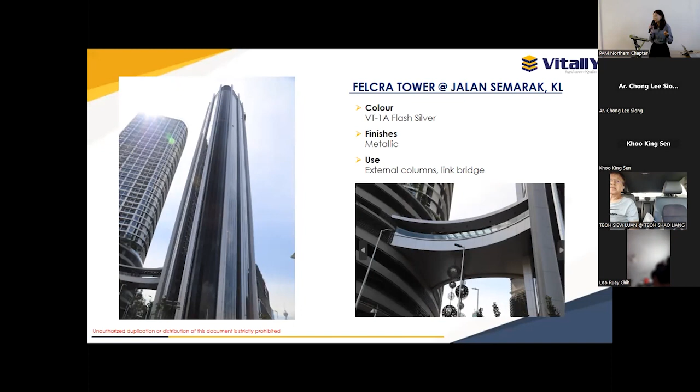Next, we have Felcra HQ at Jalan Semarak KL. For this project, they also applied external cladding, in silver color cladding.

The next one is the sales gallery project. For IJM sales gallery, you can see they applied ACP for 3 areas: the louvers, the ceiling, and also the wall hanging. For this project, we did a special color matching, since for us, we can always do color matching if the color you want is not in our standard range.

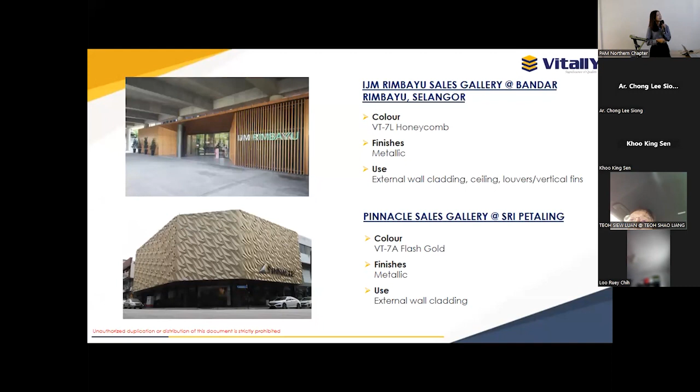So for us, we don't only supply standard solid and metallic colors, but we also supply wood look-alike or stone look-alike ACP, as well as hairline finish. One thing about hairline is it's easy to get corroded if you don't do maintenance, so regular maintenance is very important for this kind of finishing.

SUKE Toll Plaza - this one they are applying for decorative purpose also for the top panel here. They have the silver color panel and also they tag with their office.

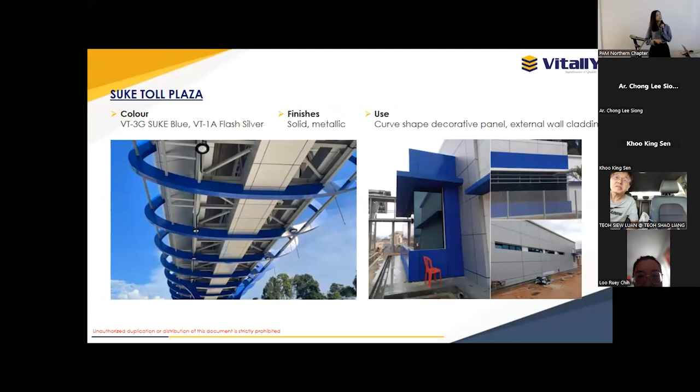Now I'll give you a brief on our company background and also our product.

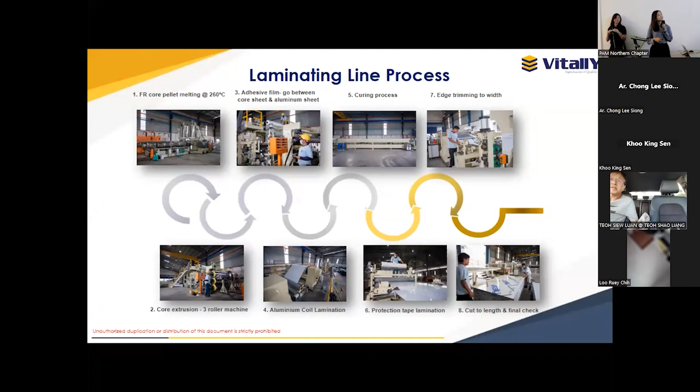And this is what we have and what we produce in our factory. Basically, all our ACP are 3 layer assembly, but come in different sets for different application. So we have ACP for external application, for interior use, awning and roofing, and also signboard. But today our focus will be the ACP for external application.

So for external application, ACP needs to meet the requirement of MS 257-2017. I believe you're familiar and you know about them, so I will just quickly go through about this.

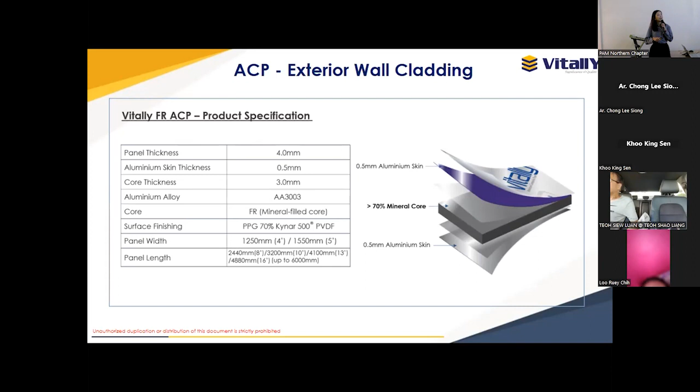So when we supply a panel to the contractor, the subcontractor, it's actually in a flat sheet. So the fabrication will be done by the fabricator, right? So the standard size that we have is 1250 mm for the width, and the length we can go up to 6 meters.

So in terms of ACP compliance, actually the usage of ACP material in design is actually very important. Following the London fire case in Grenfell Tower, actually now they are very strict on material used against cladding, especially on high-rise buildings. I believe you all know about this fire case.

So this case actually cost 72 lives because of the use of highly combustible cladding material. So our FR ACP, particularly FR ACP, is actually designed to limit the spread of flame and slow down the fire growth.

So the core material that we have in our FR panel ACP is actually containing 70% of non-halogen magnesium hydroxide. For this magnesium hydroxide itself, it plays a very important role where it will actually help to absorb heat from the material surface when there's a fire, and eventually it will help to cool down the building and also give a smoke suppression effect. So this can actually give more time in order to evacuate the building in case of fire.

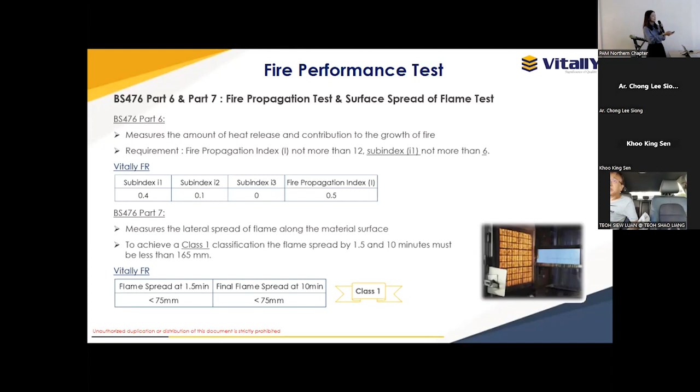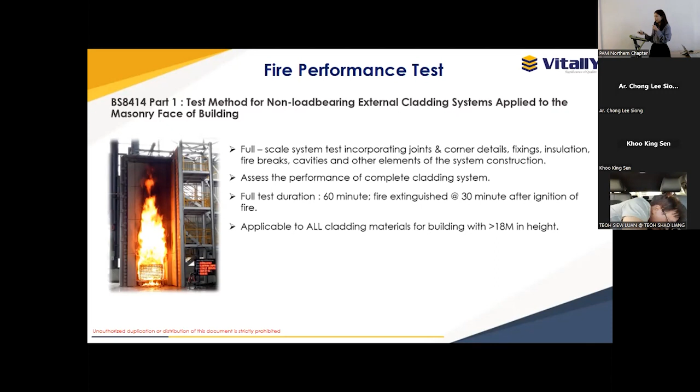For 8414, I believe you're aware, this requirement is for buildings 18 meters in height and above. In terms of coating, our ACP coating meets the standard of AAMA 2605, which is the highest standard for coating performance.

A coating meeting the AAMA 2605 standard is usually a 70% fluorocarbon-based or 70% PVDF-based coating. This coating lasts a minimum of 10 years, and is highly resistant to chalking, chipping, gloss loss, and chemicals.

For your information, our coil coater is PPG certified. We use PPG coating for certain finishes, and our coil coater is certified. It's very important to make sure your panel's coil coater is a certified applicator, because only a certified applicator will be able to give you the warranty letter.

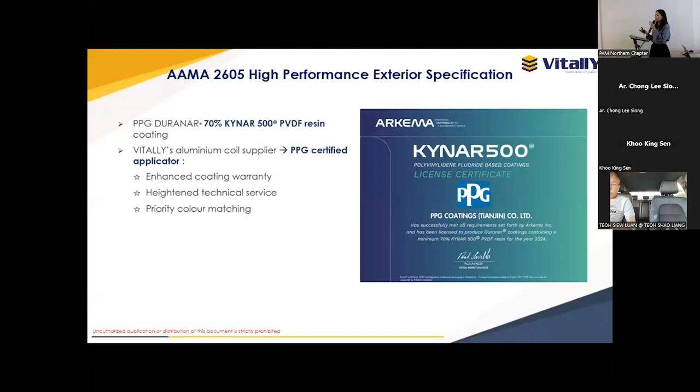In our case, we use PPG coating, and our coater is a PPG certified applicator. They are well trained in PPG application and can provide us with a PPG warranty letter. So as a manufacturer, we give you our manufacturing product warranty, and on top of that, we can give you the warranty letter for application as well.

This is the standard colors in our color chart. Currently, we have 37 colors, including solid and metallic series. Apart from the standard colors I showed you earlier, we can also supply special series like wood grain, stone grain, marble effect, as well as hairline or brushed finish.

For certain series, the price will be slightly higher, and we will require a minimum order quantity for those series. For standard colors, we don't have any MOQ.

And there are some common misconceptions on ACP quality issues that I would like to share with you here.

The first issue is color tonality or color variation issue. Color variation may occur due to several reasons. The first reason is using different batches of production for one project. It's very important to order all the panels you need in one single order from a single batch production. If you order from different batches, you will have slight color difference.

The second reason is improper orientation of the panel. During installation, you have to follow the assembly direction marked on the protective film, because if you install the panel in a different direction, it will reflect light differently, causing variation in the color perceived.

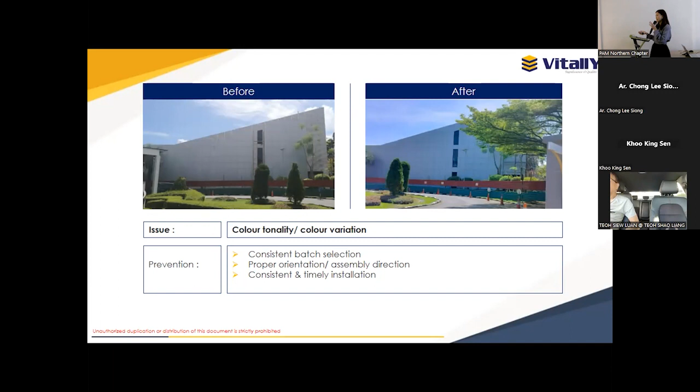The third reason is the installation timeline. A prolonged installation timeline may cause color variation due to exposure to the environment. Panels installed at an earlier stage will have a slightly different color tone compared to panels installed later, due to environmental exposure. That's why it's important to control the installation timeline between the first panel installed and the last panel installed, to avoid this coloration issue.

The third issue I'd like to share is staining and contamination. This is usually caused by improper use of the sealant or silicone used to seal the gap between panels. Selecting the right type of sealant is very important — we always encourage using a non-oil-based, non-staining, or non-leaching silicone. If you use an oil-based sealant, it may cause oily residue on the panel surface, leading to staining issues and causing the panels to look dull or lose their shine.

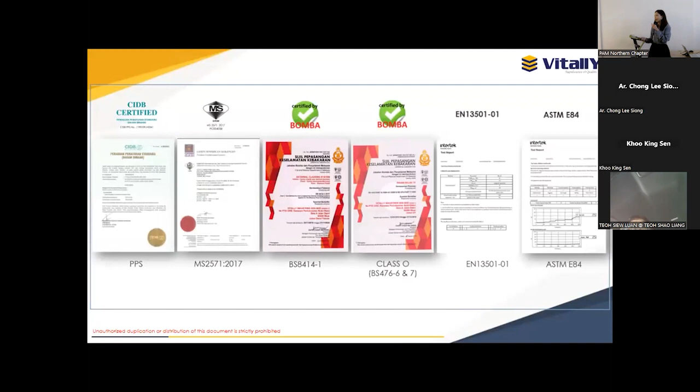I'll show you our product certificate and test report. This is what we have for our YCFR. You can find our product listed in Green Pages Malaysia, contributing to GBI points. EQ4 and EQ2 are mainly for indoor categories, and MR3 is for regional materials. Because we are a local manufacturer, we can help reduce the environmental impact resulting from pollution.

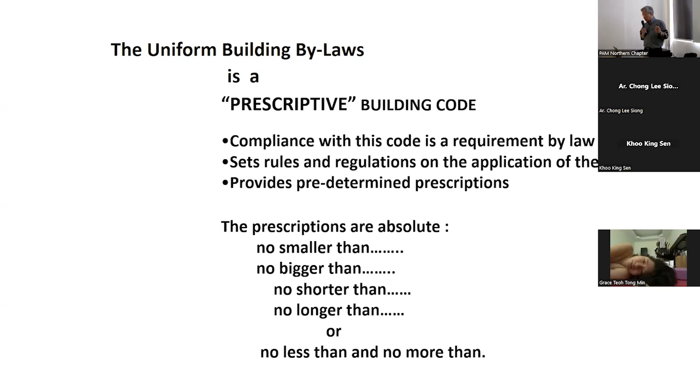Now, we also have this other document among the many standards available for all the different products, all the different applications and all that. We do have one overall Malaysian standard called MS 1183. And this... I think something's wrong again.

As standards go, standards are not a law, it is not a statutory law. Standards are a descriptive code of practice. This is where we get all our informative descriptions of what it means to have to do certain things. It establishes normative practices and it describes performance.

This is what we refer to when we come to our activity plan. The bylaw is just like a summary — at the end of everything, after you talk about what you need to do and all that, the law says you cannot be bigger than that, or cannot be this, that's all that it's important for. So you have to read all these documents together and implement them.

Alright, so I'll start with fire stop. What is your understanding of fire stop? Well, we are under the UBBL, right? So that will be UBBL first. What does the UBBL say about fire stop?

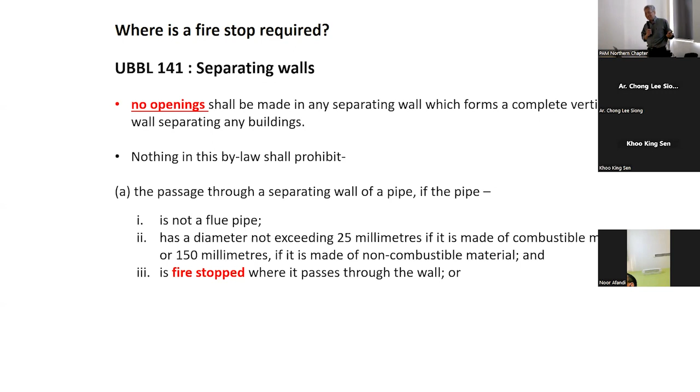Okay, opening and separating wall, which is necessary as a means of escape from fire. Actually what we mean is that if you have a separating wall, you need accommodation, access, not necessarily like that. You need an opening, you need to open the door and install things like that. Very obvious.

So it says that if an opening is in a separating wall, the FRP of an element shall not be less than that required. What this really says is, if we have a separating wall - and separating wall in this instance means fire wall, that's the interpretation - it means that whatever you do, whether you have an opening, a door, anything that features in that wall, it must be fire stopped to the same integrity as the wall as a component.

Okay, so now what do we mean by fire stop? It is actually to preserve the integrity of that component against fire.

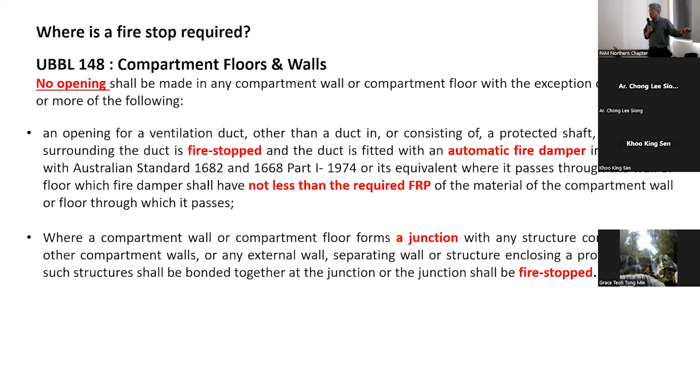And where a compartment wall forms a junction, all these junctions and others must be fire stopped. Yeah, very, very good. So where does that bring us? We're still asking what can be used as a fire stop, or what do you mean by fire stop? Now we know we have to protect all openings.

So if I continue going through, I need to ensure that opening has got the same fire integrity as the wall. But you keep mentioning fire stop - so what exactly can I use as a fire stop?

So it says: any fire stop - and here the word 'shall' appears - any fire stop, if provided around a pipe or duct in a cavity, is made of a non-combustible material. Great, so a fire stop is non-combustible. Thank you, and very important: if provided around a pipe or duct, it must be so constructed as not to restrict essential thermal movement.

So now we're getting somewhere. It says first the fire stop is non-combustible - yeah, of course, if something is supposed to stop fire, I suppose the first requirement is it's not burning itself in the first place. And then it also says the mechanical requirement is that fire stops are so constructed as not to restrict essential thermal movement. Any fire stop formed at the junction of two or more elements shall be made of non-combustible material, reiterating again the non-combustibility requirement.

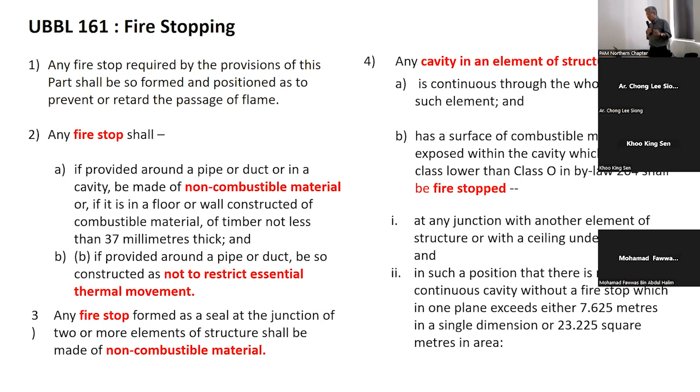You may go through a wall, you may allow it, but for a non-combustible pipe, say ductile iron, GI, or any metallic construction, maximum 150 millimeters diameter, and in any case, all of it must be fire stopped around it. What this allows, generally, if it's a non-combustible pipe, is that as part of our field interpretation, this non-combustible pipe will not burn greatly, so all you need to do is fire stop where it passes through the wall. If it's a combustible pipe, in the event that the pipe or conduit does burn away, the opening left through the wall should be no bigger than 25 millimeters diameter. That is really what this clause is trying to say.

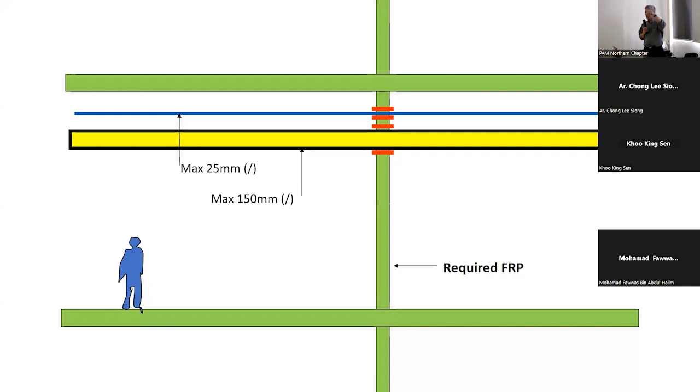In a worst case scenario, should the pipe burn away, the penetration left through the wall should not be more than that. If you have a big duct going through, like an air duct, the bylaw describes that the duct must have a fire damper that closes automatically. So this preserves the integrity of the wall element, and that fire damper must operate automatically.

Alternatively, and this is not exactly what the bylaw describes, but using the same notion, if you wrap this entire duct within a fire-rated horizontal shaft or fire-rated closure, in other words protecting the entire duct by wrapping it in a fire-rated non-combustible enclosure, then you do not need the dampers because you'll be relying on the fire rating of the duct itself, same principle as the non-combustible pipe - you don't need to wrap around it. This is the concept.

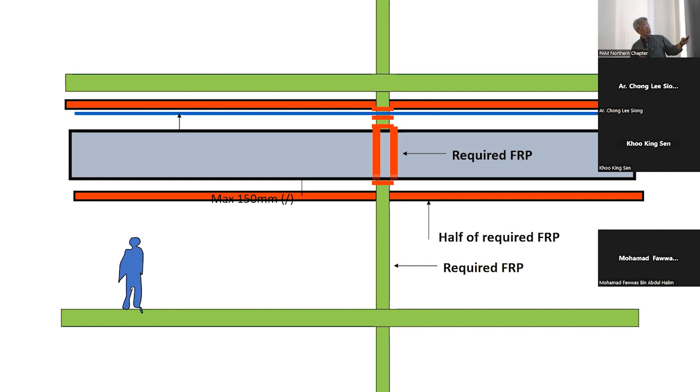Another example, if you have a vertical shaft going through a vertical penetration - same thing, floor to floor compartmentation, exactly the same thing - but if you're creating a vertical shaft like this, then that element is not an element of structure, it is purely an enclosure to form the shaft, so that is half the required FRP. If you have full FRP for structure, constructing everything as a structural element, all structural elements are to form the required FRP.

So if you have something connecting to all these elements, then those fire dampers may be half the required FRP, because it's going through a shaft. And if you are having doors, then the doors may be of the required FRP. So there's always a lot of confusion - they say, oh, fire doors are half the FRP of the building, so maybe the building is 2 hour FRP and fire doors are 1 hour FRP. No. Fire doors are supposed to be full FRP.

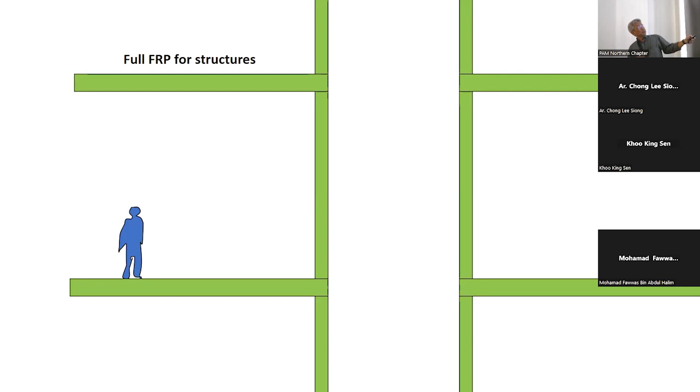But then I said, I'm sure somewhere there's a bylaw that says fire doors are supposed to be half FRP. Yeah, it's only half FRP if the door is leading into a protected shaft, or if the door is opening into a protected passageway. The concept is this: the structure requires, let's say, 2 hours FRP. So if a fire burns here, the structural integrity and stability must exist for a maximum of 2 hours - so all these elements will block it for 2 hours. If you have a protected shaft like this, between the compartments, now you've got another intermediate shaft. So if you have an element connecting this compartment to that compartment via this shaft element, it's safe to say that's why you are allowed to have half the FRP - because if a fire burns here, after 1 hour it may burn through here, but you've got another hour of resistance backup.

If you have to write new bylaws today, I wouldn't even personally bother with this description because it just creates so much confusion. In our current projects, I'm going to comment on this - please don't tell my client - I don't go to this extent of identifying which are the doors that we have on our page.

Because we've had problems before. There'll be so many layers of documentation that can get us into trouble. First, our own architect specifying the doors - you trust that he knows exactly what he's doing. Then there'll be our draftsman, or whoever it is, cleaning all these things into our documents. Do you trust that guy?

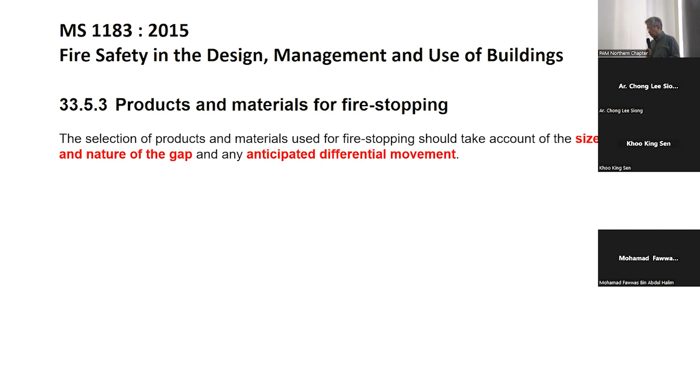In a case where minimum differential movement is anticipated and where the gap does not exceed 5mm, the following fire stopping materials will be used as evidence - this is in Malaysian Standard 1183: A, cement mortar; B, gypsum-based plaster; and C, cement or gypsum-based vermiculite or perlite mixes.

Now, why did Malaysian Standard 1183 come down to mention these three items? Because these three elements - cement mortar, gypsum-based plaster, and cement or gypsum-based vermiculite perlite mixes - are in our Schedule 7 of the UBBL, among the materials that are deemed to comply. So in the UBBL, where it says non-combustible materials for use for many other purposes, these three elements are in that schedule. So Malaysian Standard MS 1183 makes reference to that - whenever non-combustibility is mentioned, these three elements are deemed to comply.

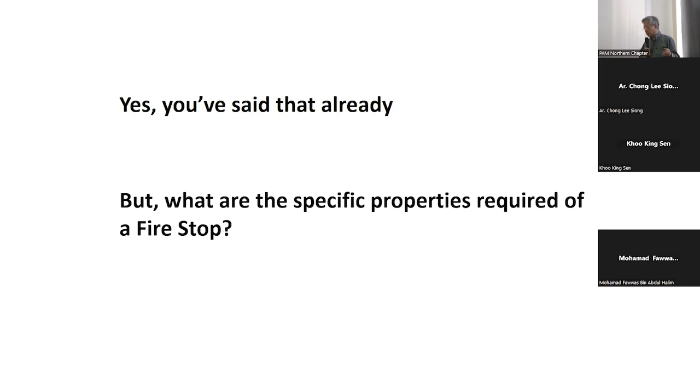Okay, let's look at this: properties required of fire stop. We already established that cement mortar, gypsum-based plaster, cement or gypsum-based material deemed to comply. You walk into a construction site, do your inspections, a pipe goes through, and the contractor packs up the opening with cement mortar or plaster, or a combination of those materials. Okay, it's done. Let's look at the properties.

In accordance with the UBBL and references to the standard, what are the properties? First, non-combustible. The key elements, are they non-combustible? No, we cannot answer that yet. Let's try and define what it means by being non-combustible first.

So, BS 476 is the fire test on building materials and structures. Our UBBL almost entirely references BS 476 when it comes to fire materials. Part 4 is the non-combustibility test for materials. This is 476 part 4. It is a very small-scale material test.

Generally, it just consists of having a combustion chamber where you're always placing two materials. One is the base material, which is a known non-combustible material, like stone or gypsum. The other material is the one being tested. So they will always occur in this manner - there's always a reference material and the other material.

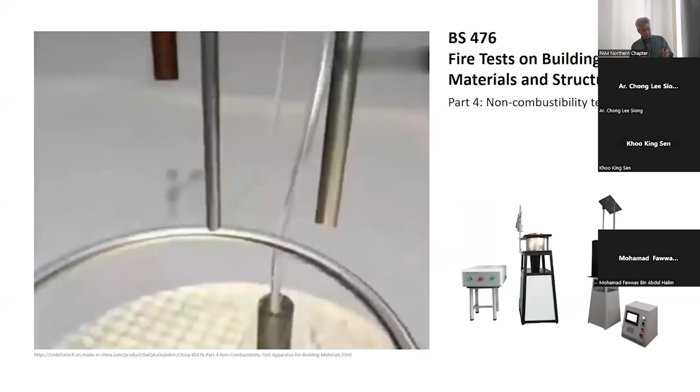This is a very quick video I got from YouTube. So there are two materials: the base material, which is a non-combustible material, and then the material that you're testing. From here, all you do is measure it in terms of the propagation of the flame, the temperature, and the smoke. So it's a very, very simple test.

And the criteria is very linear - it exceeds that parameter, it's deemed combustible; if it doesn't exceed the threshold, it's deemed non-combustible. So it's a pass or fail kind of test. It's either combustible or non-combustible, nothing in between. Even if you're right at the bottom, say you can just barely pass, you still cannot call this non-combustible - sorry, the test is the test.

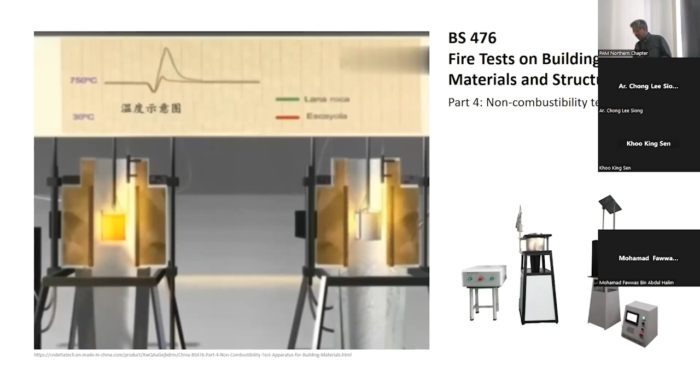It's so straightforward. This has been used for 50, 60 years already. You can't do anything about it, but that's the limitation of the test. Okay, but never mind - the UBBL still references this criteria, non-combustibility.

So is cement mortar, gypsum-based plaster, cement or gypsum-based material non-combustible? Yes, because it's already embedded in the UBBL deemed to comply. So we don't question it anymore - we don't ask for certificates anymore for this material.

The next criteria: same fire resistant period as the wall or the floor. So how do we determine that? Can we use that non-combustible test to determine fire resistant period? Of course not, because that's not the criteria, that's not how the test is structured. So now we have to refer back to British standards again, 476. How do we determine fire resistance?

So 476 part 22 is where we determine fire resistance of non-load bearing elements, and this is essentially a scale test. This is what we use for testing fire doors, panels, and all that. This is to test the key element - stability, integrity, and insulation of that element as a fire barrier. What is the characteristic of this material to prevent a fire from spreading from one compartment to another?

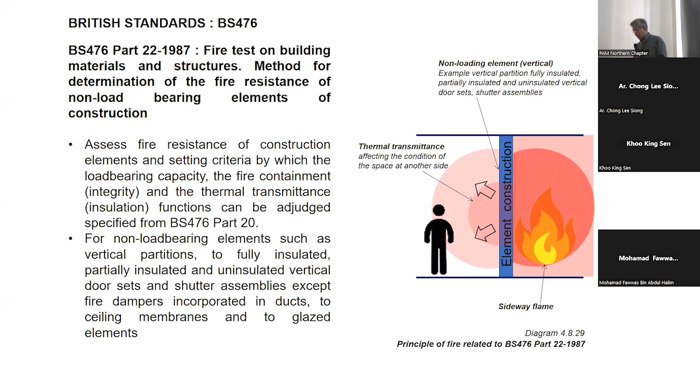So this scale of test, if you look at it, is like this - it is a furnace. Oh, this is video.

Okay, this is part 22-1987: determining the fire resistance of non-load bearing elements.

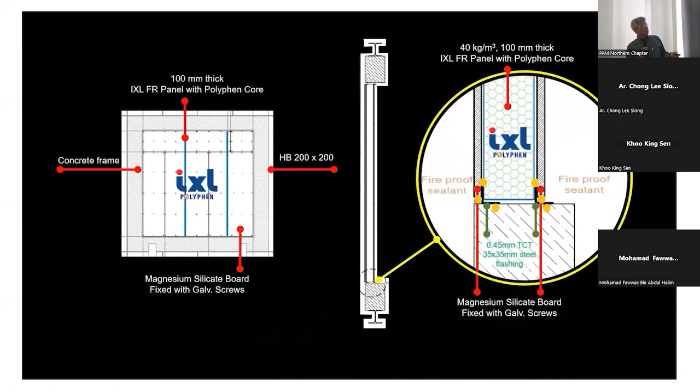So it's again like a full scale test. There is a furnace at the back, and there's this surface which you intend to test the material. You have to construct this entire surface with the material, put it in the furnace, light up the fire behind it, and put in all the thermocouples, then measure the fire integrity. For this one, it's not for load bearing, so we only measure the integrity of the material, not the stability.

And if you want, they also measure the insulative values. Right, so this is it. So part 22 is testing a material in this manner.

So the question is, our topic today is fire stops. How do you test different plaster or how do you test your fire stop material using this method?

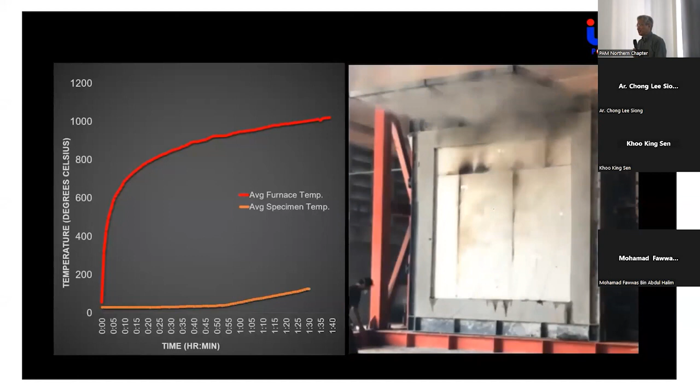Generally, you can't. We're talking about fire stop, sweeping some material around the pipe. So how do you determine the fire rating of the material? You can't. We can't build an entire wall out of the fire stopping material and test it in this manner, because it just doesn't work. So this is the wrong test. We can't do it.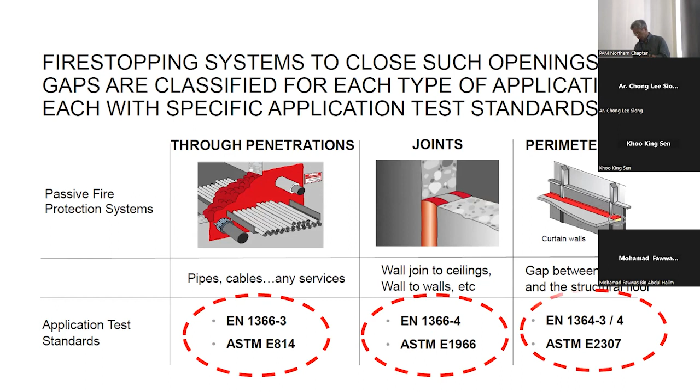So I will share with you an experience on a project we conducted about 2 years ago, where we specifically took this on, as the architect being very easy-going about it, going beyond what we're supposed to do. Thankfully, the client was eager to let us use our own devices. They didn't bother us too much.

When we first started the tendering documentation for this, we told the engineers that we would want to look after fire stopping. We took it away from the engineers because most of the stuff is done by the engineers. Actually, it's not true - engineers don't even look at the fire stop. What the engineers do is rely on eventual subcontractors or the eventual continuing utility suppliers to do the fire stop, because all they do is write it in the clauses.

Where you have a situation that goes through, you check with the architect, if that's on your wall, you have to provide a fire stop. So they tell it in that manner, but for this one, we made it easy for the client, so we put it together with engineers, we put everyone together.

All fire stops, engineers, you refer to a provisional sum to be managed. Right at the start, we provided the information. We used this document for this project, so we took the opportunity to learn very quickly all the technical details of fire stopping and how to document it, how to get everyone on board. So that's what we did.

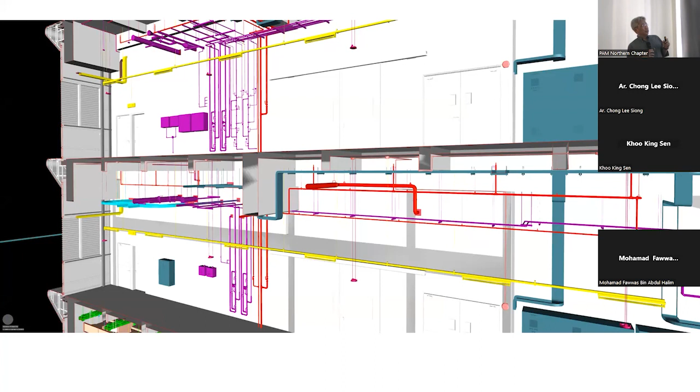Step two is where we start the practice part. Once you identify where everything is supposed to go, where all the penetrations are, this is when we will refer to suppliers, refer to people in the industry. We will want to start looking at what are the available materials, what elements are necessary, standards, and how do we apply those elements, what are the applications, what are the communications.

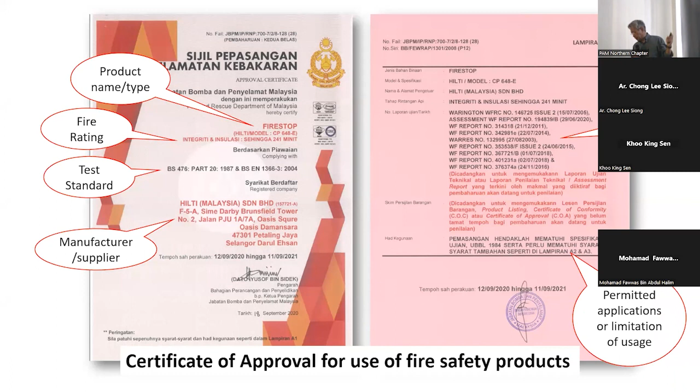Once we determine that, this is essentially the hard work. So we've got our building design. We identified the areas where you need the fire stops. We found all the necessary certified components that we can use.

So this is really the process so far. We have to go through every single corner of the building. We have to identify every single penetration, cluster them together, identify where all these elements are, and try to match it to what we think we know of the product we're trying to specify, and all kinds of things.

So generally what it means is that this is hard work. You have to schedule each fire stop by type and quantity, based on the design, so that everything is accounted for. But to identify these things, we literally have to walk through the model.

So I suppose in a way it's really helping us a lot. We're not looking at 2D plans, but we actually have to walk through every single model to find them, and then mark the spot. So we identify the spot and we label it.

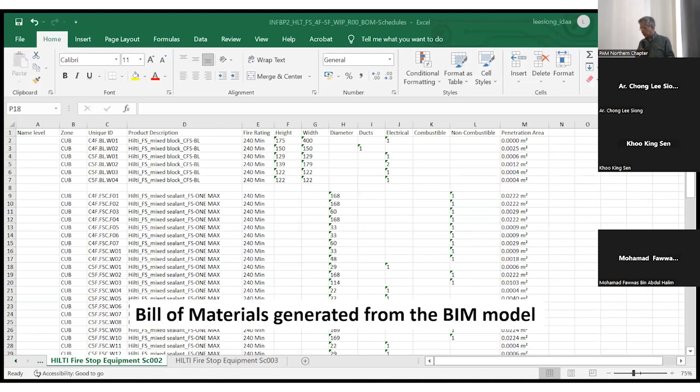Then from there, we generate from the bill of material this whole tabulation by location, by the unique ID of that element, the product name and type, the dimension, the size, the type of penetration, and of course the quantities available. Immediately we can do everything in one go.

So after the hard work, this is the result, and we find that it's actually very, very good. Then the fourth step is of course the construction. Once we hand all these documents to the contractor, we put the liability on, and now you get the result. So generally, this is what we do.

So these are just called sealants in various forms. Some of them, depending on how we do the opening, some openings are just cored through. Some openings we actually cast in sleeves before we open it up to allow for this. Despite the best design, construction is never exact, so there's no way we could get the pipe to go in exactly, which is why we always design for slightly larger openings.

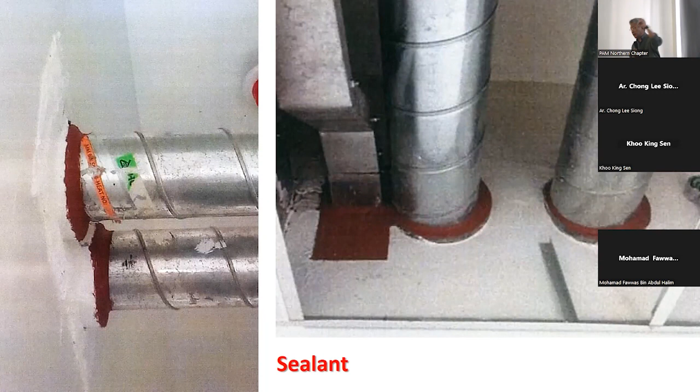In any case, we will end up using a collar. So when this thing burns, remember what the UBBL says? It is a combustible pipe limited between... so in a situation like that, it really doesn't comply with it.

The intention is that we must have proper fire stopping. By identifying this kind of fire stop, we can have combustible pipe far bigger than 25mm. These collars work in a way that when the intumescent material is heated up and the pipe starts to melt, the collar will kick in - they expand and shut off. That is the intention, how it works.

And then there are mixed blocks. Mixed blocks are effectively sealants, but they come like a block of plastic. This makes it a lot easier for openings - for example, openings for cable trays or multiple cables going through, there's no way we could organize sealing through a single one. We have to look at all of it, so one cluster of things going through.

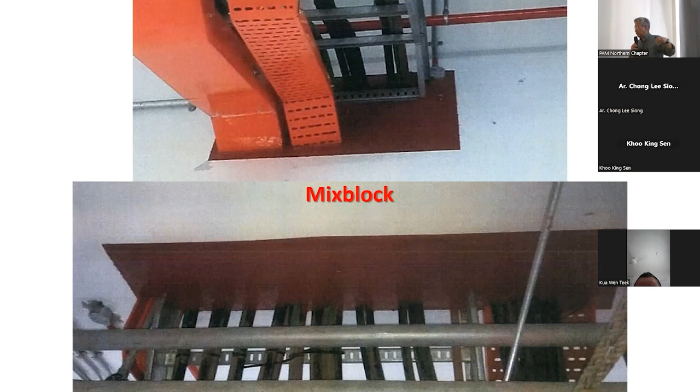Especially for things like this, we work on both vertically and horizontally. Now the next one will be composite.

This one fulfills the second Malaysian standard criteria on the structural integrity or structural stability of these fire stops. For situations like this, fire stops are so big - like this one here, the slab is cast with this big opening, because there's no way you could individually allow for each of these, so we make a full opening like that.

After all of this is done, we have to come up with the composite construction, whereby there is an intumescent material that forms a very strong seal, but there's also this top metal plate that you see, which is purely for surface protection, so you don't step on it and push holes into the fire seal.

But at the bottom, from the side, you can see there are these trays. These additional trays support the metal plate, and this is what holds it together. These are the structural reinforcements to hold the material in place.

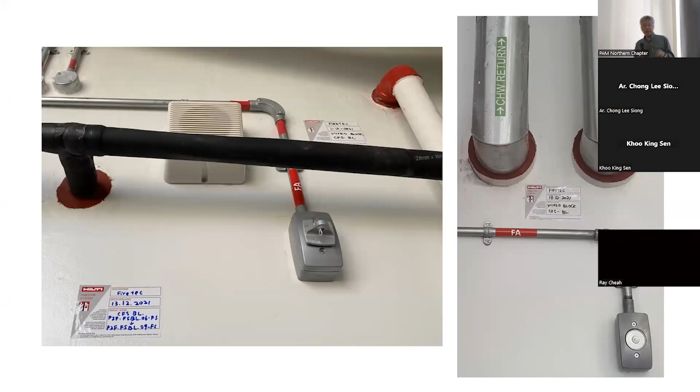So in inspection, this is more crucial, because in our design we have BIM documentation that has identified clusters of where we understand the location, size, material, and all these things. The intention of this project was that we are supposed to bring it to LOD 600. That means you have the full digital documentation for the purposes of maintenance.

So the original intention was that all of these tags are supposed to be QR codes. Once you register, a QR code will be generated for each of these.

So in the future, someone may come along and open this up to redo things. With the QR code, they will be able to know the exact classification of what's going in here, when it was last touched, who was last to touch it, who signed it off, and what evidence it was supposed to be there.

But for this situation, our supplier at that time wasn't ready with the QR code, so we ended up with manual tagging. But all these numbers match our BIM documentation, so it's just one step short of full digital tagging.

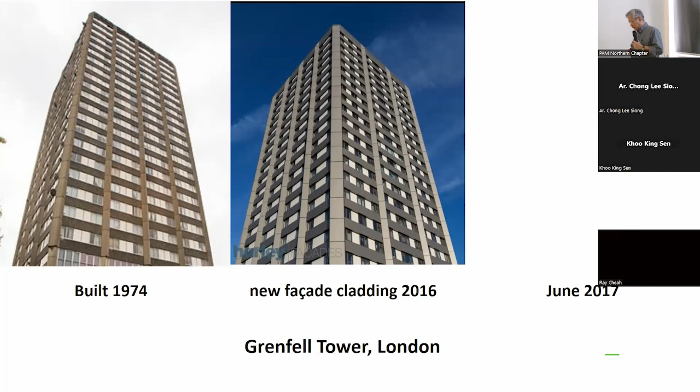Not just - we've seen this before maybe, but let me recap it. Grenfell Tower, London, built 1974, a very nice brutalist architecture, completed recently with infill windows. New facade cladding added in 2016 - they were trying to make the building look better. In June 2017, it really changed the landscape of the town due to the fire.

Probably the model in Milan - there's a very beautiful building, also a residential apartment complex built in 2011. In August 2021, just before it reached its 10th birthday, it was totally engulfed and burned down again.

The commonality in these two buildings and fires - one probably can see this in the Milan fire. In Grenfell, fire actually started from a faulty refrigerator on the 4th floor. It was in the apartment on the 4th floor. The refrigerator burned, the whole refrigerator caught fire.

The alarm was raised, and the fireman actually came, entered the apartment, looked at the refrigerator and declared that the fire had been put out. They said okay, fire is out, everyone safe, the refrigerator is put out. But what actually happened was...

I'll show you this video now. I think the last time I tried to show this video, and this is a very, very typical apartment fire.

You see it even in Malaysia, this situation of a fire in an apartment like this. Generally, it is burning out of an apartment in the building. Here the fire hasn't reached flashover yet - it has just arrived. Let me pause here for a moment. You can see the fire hasn't reached flashover yet. Generally the content of the apartment by now would have been affected, but it's not flashover. So what we have here is immediate flame probably breaking out through a balcony door.

And it's burning through - this is a canvas. The fire is burning through, the hot smoke is burning through the canvas, but the canvas is not exactly on fire at the moment. It's just burning and turning into carbon. Now as the fire is burning, we reach this situation - the fire is now burning. You can see the effect of the smoke going up. This canopy is sagging because of all the thermal pressure from the very hot smoke going up.

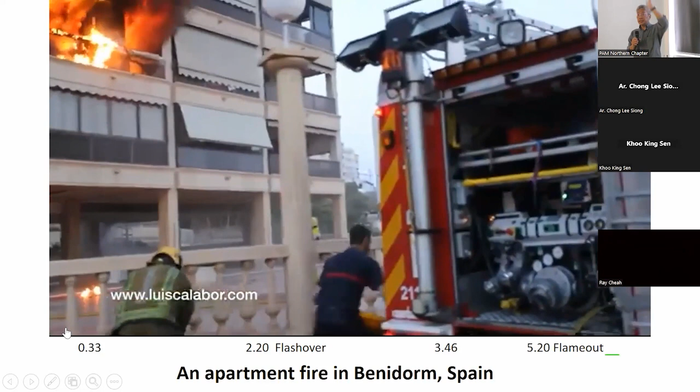Look at the firemen now - they finally connected the hydrant to the fire pumps, and they're now shooting water up there. But where are they shooting? They're all shooting the water around the side of the building, particularly at the top. There's no point whatsoever trying to shoot water straight into the fire, because flashover means the temperature is so high the water would evaporate before it even got near the fire. So what they're doing is cooling down the temperature to prevent the spread of fire.

So you can see now the canvas balcony has burned through completely - it's been consumed. All we see are the metal frames hanging down. The apartment still seems reasonably intact. They will have a lot of smoke infiltration for sure, but it doesn't feel like it's caught fire. And on the apartments on both sides, the clothes hanging on the balcony still remain unburned. Oh, this is the resident - they did manage to rescue him out of the apartment.

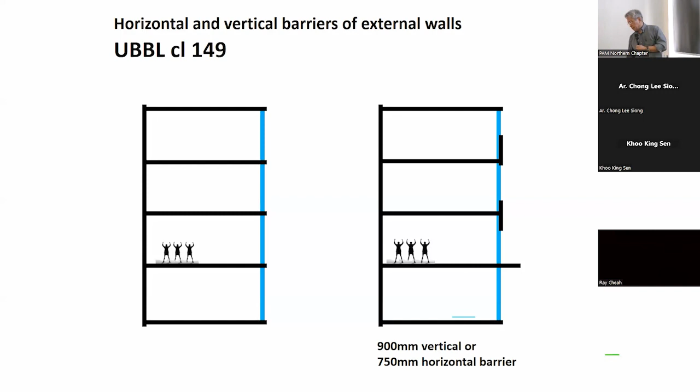In the UBBL, all our way before we had the 8414, way before Grenfell, we already had provision for this: the prevention of fire spread from one compartment to another, especially floor to floor, and that's the reason why we have compartmentation. That's why there are volume limits for all the purpose groups in the building, with the exception of offices and basic assembly. All other purpose groups have volume limits to the fire compartment, and floor to floor we've got limits. So the UBBL clause 149 already has this provision of vertical and horizontal barriers.

So if the fire breaks out here, fire spread is the reverse of pouring tea from a teapot. We all have the same problem - when you pour tea from the teapot, if you're a little slow or for some reason the tea leaks back at the spout, it starts dripping down and you say, why am I getting more water on the table than into the teacup? Fire is the opposite of water.

Water becomes fire when fire boils water. So if you flip the situation around, fire moves upwards, it reacts in much the same way - it likes to follow the surface, like a surface tension effect. When the fire burns up, you don't want it to come back into the building. So this is where in the UBBL we have this vertical and horizontal barrier situation, where the intention is to deflect the fire away from the surface of the building to prevent it from coming back in.

In the video we saw just now, that's exactly what happened - they have these vertical beams, so the fire has a chance to not link back into the building. Of course smoke gets in, but the effect is that the flame doesn't link back into the building. This is really effective, and I believe all of us are doing this, right? Yes.

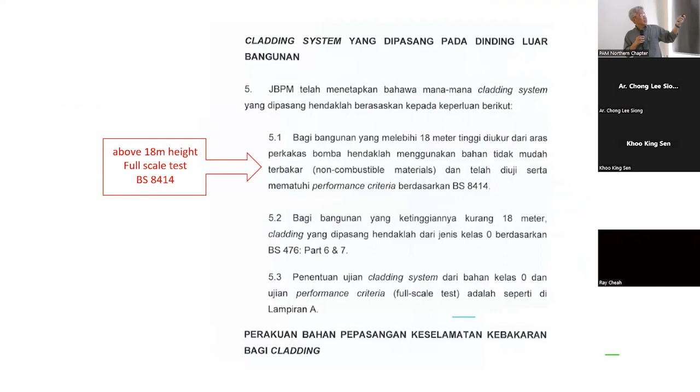So this is the circular that they issued. Essentially it says exactly the same thing: now all buildings, because of height with external cladding, all external cladding are subjected to the BS 8414, and anything below 18 meters in height would be subjected to a Class 0 certification.

This is the difference between the old UBBL 1984 and 2021. Previously, all it says is: if your building has any cladding below 18 meters, there are prescriptions - what you can use, what material, how far apart the paper has to be, and so on. Very descriptive as to what you can use as cladding or wall surface. Whereas if it's anything above 18 meters, you comply with Class 0. That was 1984, prior to 2021. So we are not actually guilty, because we are in full compliance with the bylaw. But now in 2021, anything below 18 meters must also comply with Class 0 - in other words, all building claddings, all external cladding, must now be Class 0.

That will now be Class 0. But if you're building more than 18 meters, then you need full scale testing to comply with BS 8414.

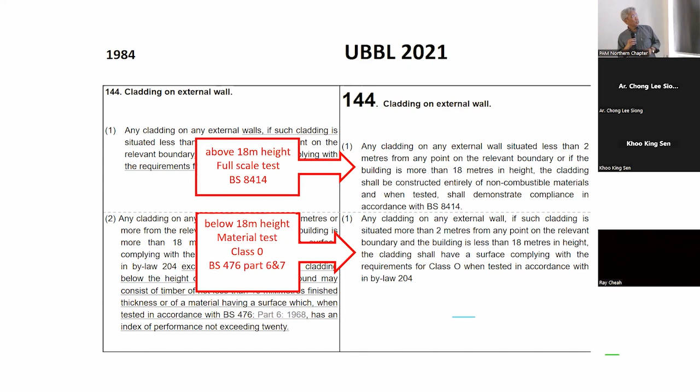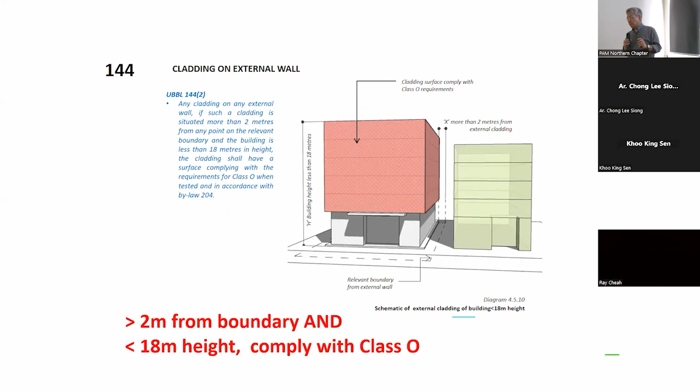So that is the new classification. Let's clarify again: generally, if you're less than 2 meters from the boundary, or if you're more than 18 meters in height, you comply with BS 8414. If you're more than 2 meters from the boundary, and less than 18 meters in height, then you must have Class O. It's kind of straightforward in a sense.

Now, I think this is where the real understanding comes in - what is actually Class O? There are actually no standards called Class O. There's no grading known as Class O anywhere. Let's go to - okay, first I have to show you. Chong Lee mentioned this morning already on BS 476 Part 6 and Part 7, but let's look at it, try to look at the video.

Okay, first warning - not warning. This video is very boring, it doesn't show you much. Thankfully it's only a few seconds.

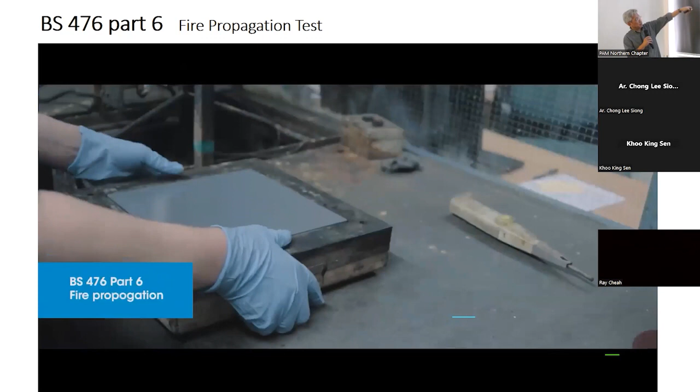Showing you what BS 476 Part 6 testing looks like. So this is the material that they are putting into this frame, and they are bolting it onto this little furnace. You say, huh? Furnace is supposed to be a giant room, but it's not. And that's it, that's not it - so the material is fixed this way, facing the little Bunsen burner on the other side. And then they have the smoke holes, and they measure smoke and all that. That's it.

So what I'm saying is, BS 476 Part 6 is really a testing of a very small sample of material. The frame standard size is about the size of an A4 paper. And it is only measured by a Bunsen burner flame on the surface, measuring the fire propagation via thermocouples and via the measurement of smoke and steam. It's just that, and then you go through a very complex formula meant to engineer complex formulas, because architects are very good at maths.

So we don't question them - so difficult, that index. Okay, this one you need an index of 6 or below. So it doesn't matter, we won't question it. What we see is a very, very small sample, and you're only exposing one side to a Bunsen burner, and they're just getting the same configuration - all to practice an index of the propagation, right?

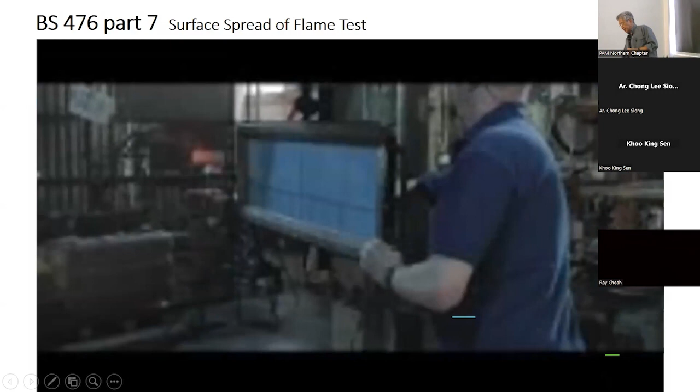Part 7 now - this one is a little bit more visible, and I think it's something that, okay, at least the architect can say, I know what this is. They can't cheat me this time. So let me show you the video.

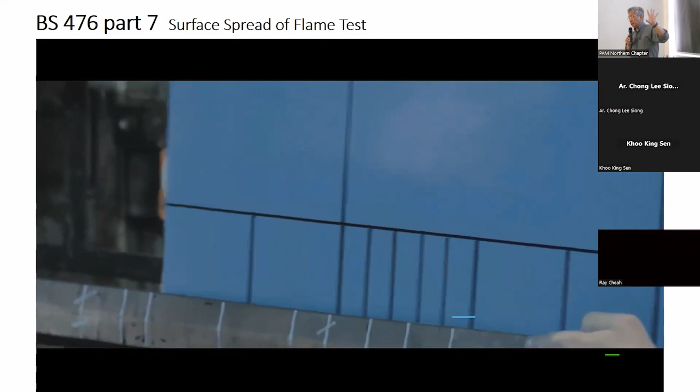This is Part 7, surface spread of flame test. It starts with the sample that you're testing - the sample needs to be fixed, and those markings are the standard template you must mark on the sample. You expose it to a heated surface at a 90 degree angle. This is the heated surface at a 90 degree angle, and there's a little Bunsen burner there that shoots the flame at the corner. Can you see that?

The whole purpose of this test is to measure the spread of the flames in that direction. The markings on the set - the flame is spread at a low temperature, and over a fixed period of time, they measure or observe how far the flame has spread. These are all the markings, these are the thresholds. So if the flame does not spread beyond that line, the first line, within...

1.5 to 10 minutes, yeah - so short, you know, and the sample is so small. The sample is just that big, a very small sample. And we are only exposing the first surface, because it's spread of flame in this fashion. So yeah, that's really it.

Okay, great, let's go back here a bit - so that's really all that's mentioned. So now we've got two tests. We've got Part 6, which is the propagation index - whatever the index means, it's about the likelihood of the material propagating flames when it's on fire. But first, whether it's actual fire or not gets determined in the non-combustibility test, Part 4, which is non-combustible. So the material is either combustible or non-combustible. If you're non-combustible, you don't have to worry about this, because it's deemed non-combustible.

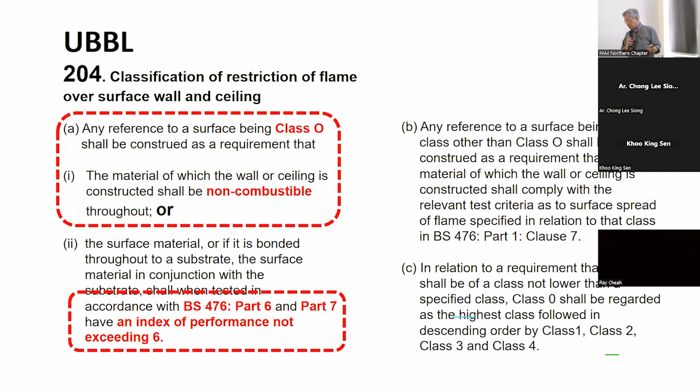So this is actually if a material comes and they say we pass Class O, essentially the material has a classification, they will go through these 2 tests to determine this classification. Alright, so external cladding, very quickly to recap.

Now we've got 2 classifications of external cladding. Below 18 meters, material, surface material class O. Above 18 meters, you need BS 8414. And to recap, class O means the material has come through the testing, part 6 and part 7, meeting these indicators. And if the material has not gone through this testing, it must be a deemed to comply material, i.e., non-combustible. So all the masonry buildings, plaster and paint, no components - you can't find any element to find out the C1 and C2 values. Right, basically. Okay, so what exactly is BS 8414 now?

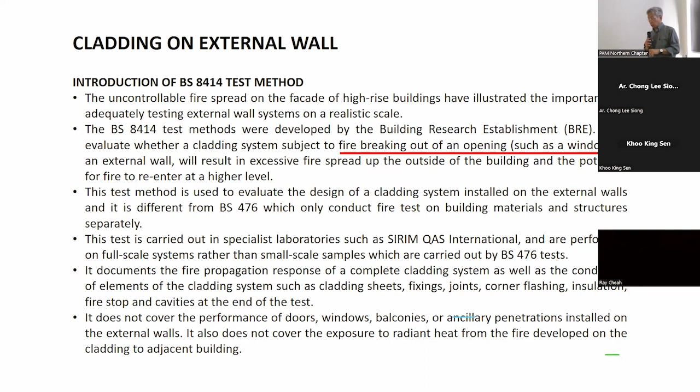The primary simulation of this is that of a fire breaking out of an opening. That is the entire premise of this test, purely that. So from the video you can see the fire in an apartment building.

If the surface cladding material is non-combustible, the fire stays within the compartment. In the case of Grenfell and in the case of Milan, the fire broke out from inside the building, either at the balcony or in the kitchen, reached the external cladding, and brought down the whole building. Yeah? So BS 8414...

...is the test to simulate what happens if you've got a fire breaking out of an opening, such as a window or doorway, an unconstructed opening. How does the cladding respond to that? That is what we have to focus on.

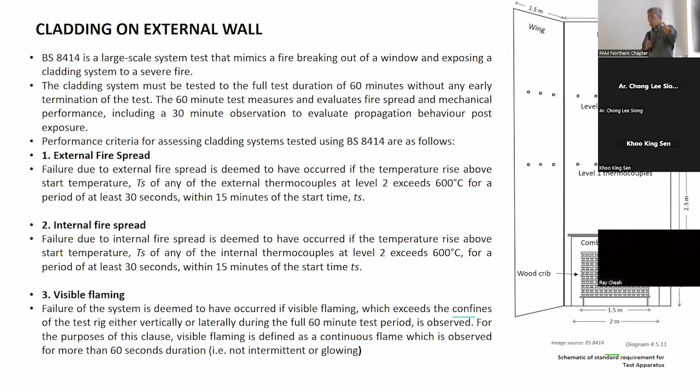It measures the internal fire spread, and it has visible flaming - that means we look at the visible flame that we can observe. That's 1, 2, and 3.

And then that's 4 and 5, which is mechanical performance - how stable is the entire structure? Does it peel off? Does it deform? Or worse, does it collapse on you during the fire?

And 5, burning debris and falling fires - if the structure is still standing up, not collapsing, what are the debris that's falling down? What are all the various components that burn off and fall down?

Then for part 2, there's the additional criteria number 6, which is called system burn through. This one only applies to the part 2 test. Part 1 is criteria 1 to 5. Part 2 is 1 to 5 plus 6, called system burn through.

Okay, do we want to see this video? This is the video of the SIRIM testing facility. Okay, I'm going to bring this up - it's more of a SIRIM promotional video.

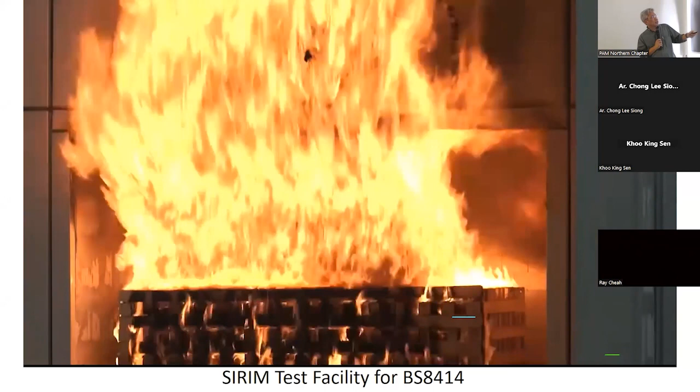That is the size of the entire rig, so all these are standard. This is the crib, the burning fire, and the intensity of fire or fire load is controlled. The density of timber making up this crib is 100% controlled, meaning every single test will use exactly the same amount of density.

Also, because this one piece of timber, Malaysia will have to import a piece of pine wood. I don't know why they did not find a local equivalent, but for the purposes of standardization across the entire world, we have to import pine wood just for that purpose. With that density, that's how we put it.

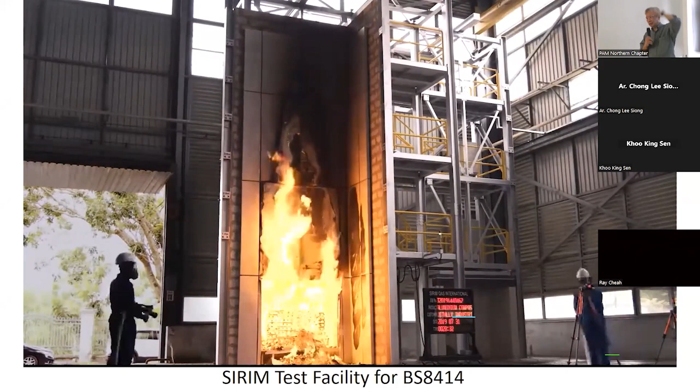Generally, you can see that this is a simulation of a fire breaking out of an unprotected opening. That is the simulation. Okay, let's move on.

Okay, this is an example of the BS 8414 part 2 test. Observe the difference. On the front, it looks exactly the same. This is the simulated opening, or when the fire is breaking out of an unprotected opening. See the fire breaking out of the unprotected opening and then leaking back into the frame.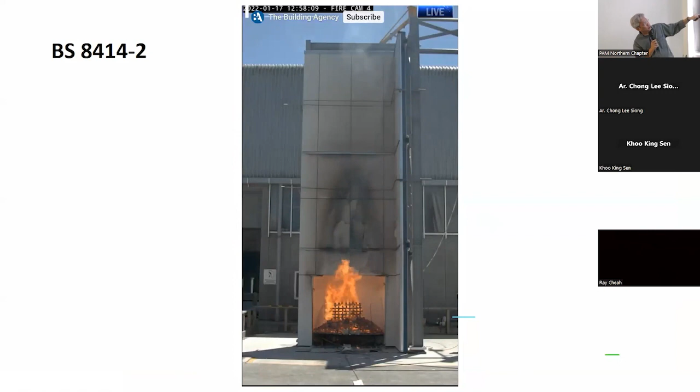Alright, now this is part 2. You can see that there's no masonry wall. Part 2 is for a cladding system whereby the cladding system is the wall itself - you are not putting cladding as skin over a non-combustible wall. If you've got no wall and you put your cladding system on as a wall, that's when you go for the part 2 test.

Okay, and just to emphasize on the material, regardless of part 1 or part 2, one of the main criteria is the visible flame zone. The flames coming out of this predetermined opening with this particular fire load, the flame cannot be seen going outside the surface of this sample. If the flame burns sideways like this, it fails immediately.

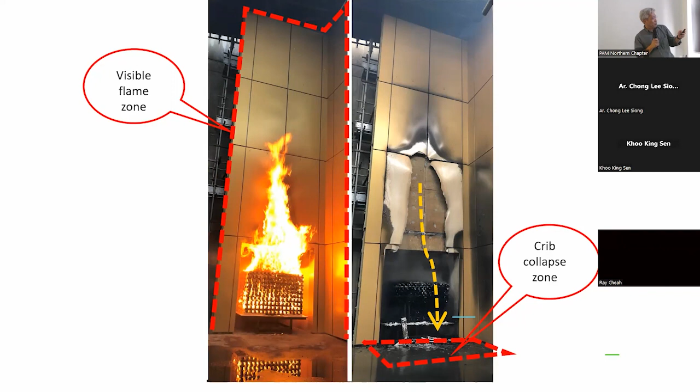So here, now we have to understand precisely the difference between part 1 and part 2 test, because it cannot be used interchangeably. This is the testing way, it starts off this way. For the part 1 test, the facility will have this chamber that you see in the video.

That is the crib, and the crib students will assemble it. You have to pay them, and they will assemble this crib for you with the precise angle and the precise density. Then there will be this wall.

This is the wall, like a masonry wall. In BS 8414-2, everything is exactly the same, but there will be no wall - instead they give you frames for you to attach your system to. So these structural frame elements here will not be part of the test. We are not testing the integrity of these components, but these are the basic components forming the test rig for your components - so these are not relevant to the test.

If the brick wall falls down, okay, that is failure of the test, not failure of material. Likewise, if for some reason this steel bends during the test, they have to take the sample and start again, because that's a problem with the steel, not the cladding.

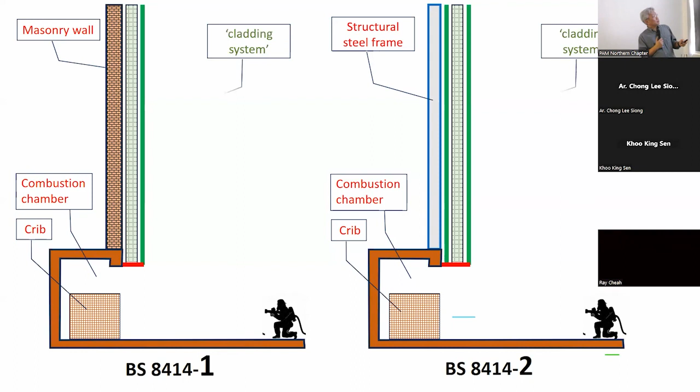There will be the flame from the outside, temperature of the external thermocouple. There will be a flame from the inside and the internal thermocouples. There will be mapping the spread of flame upwards. They will be measuring the temperature at 1.2 or 1.5 meters - I think that's important. At the lowest layer, the thermocouple will measure. They'll be observing visibly where the visible flames are, whether they're swaying outside the building or not, and then observing falling debris and all that.

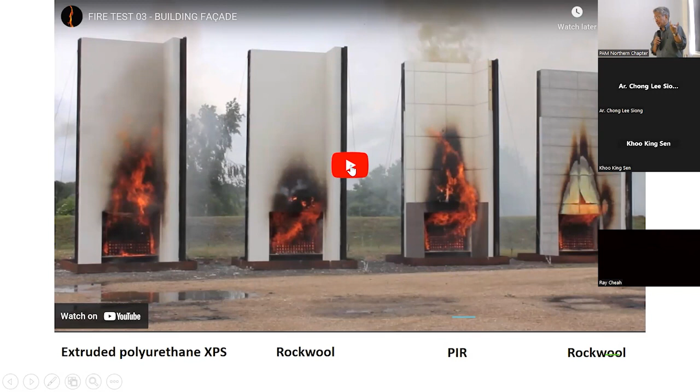So let's look at this test. This is not exactly a very rigorous test because they didn't start at the same time, so it's not exactly a fair immediate comparison. It's more of a visual test for us to visually acknowledge and understand.

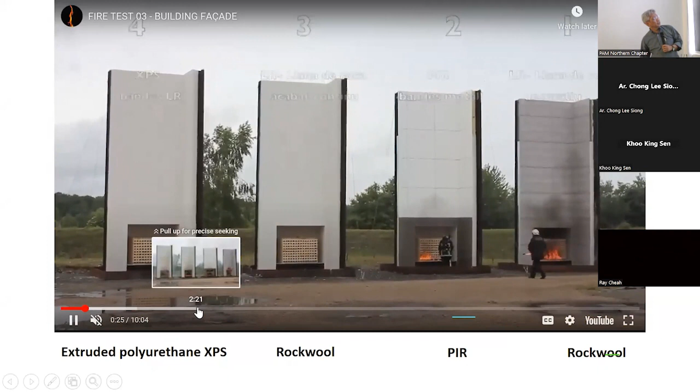The file is all set. We're just setting the fire one at a time. Okay, let's start. After about 2 minutes, since the fire started a bit earlier, the fire quickly matured a lot faster.

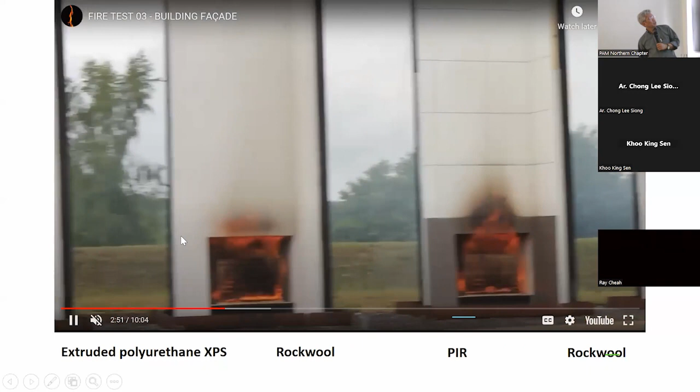When you start seeing the performance, you can see that this aluminium material started to char on the surface. And this similar material is also starting to char on the surface. This one started to burn a bit later, so it hasn't started charring yet. But let's fast forward a bit more.

At about 5 minutes - remember, this fire was started a bit later, just a few seconds after the first one - this one's surface is charring already, but it's not yet in the contributing phase. You can see the lamination is breaking up.

So you can see the lamination, and the lamination is now exposing the insulation. And once it breaks open like that, you can see that the fire is actually within the cavity already, burning through the rock wool and trying to burn through it.

Right, then another one on rock wool. This one, the fire was started a lot later, but it is still only charring the surface, so it's handling very well. Obviously the rock wool is just not burning - it's doing what it's supposed to do. It just doesn't burn. That's very good.

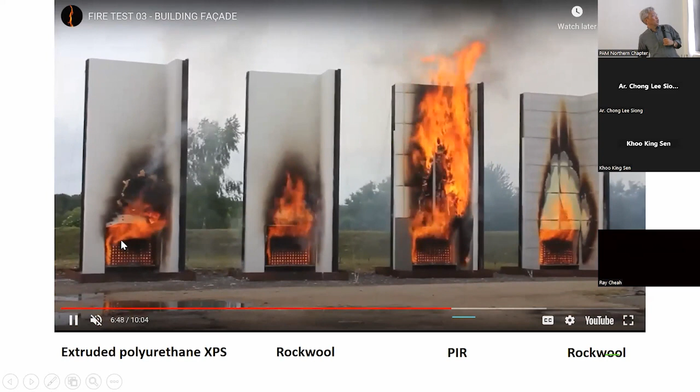So PIR is the concern. Then you might say, well, not too bad then, use the cheaper polyurethane. But remember, this fire was started last - they started the fire here, and this one was at least 2 or 3 minutes behind. So PIR is the concern.

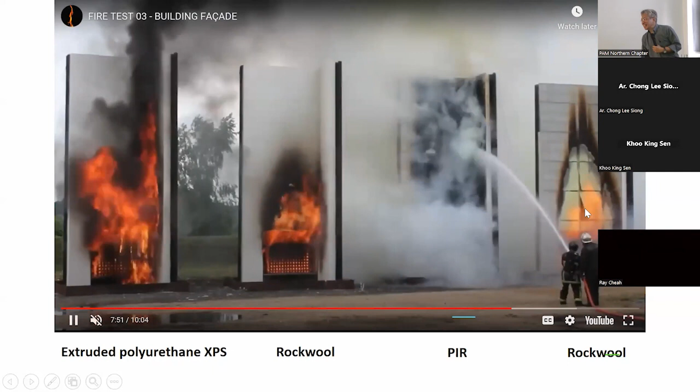Okay, they have to put out the fire already because it cannot be controlled anymore. But then you look at what's happening with polyurethane - the rock wool is still burning. Look at what happened to the polyurethane.

So the moment it catches, it's again an uncontrolled fire. The polyurethane shoots out black smoke that's highly toxic. So that's why PIR is still a little bit more acceptable, but PU - no way.

So we do know we have a lot of use of foams and all that. It's far more acceptable because of how it reacts on the surface. So we accept that, but our caution is: you have to recognize that PU, PIR, all these poly materials are highly combustible.

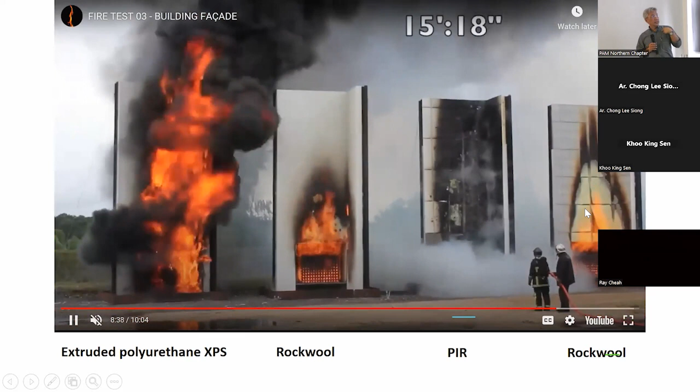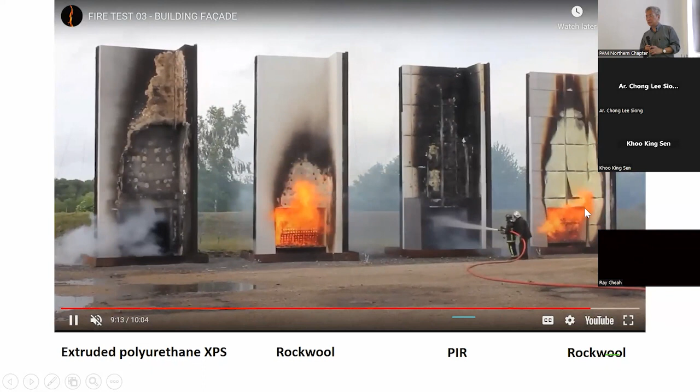So that brings us to our detailing. If we are specifying this under Fire Safety Class 0B, be very careful how we detail the foam, how we detail the areas where we have openings, where we have penetrations - we want to ensure that the fire remains on the surface and does not burn through into the insulation. That is the more critical performance.

And you look at that now - how the two rock wool panels are still burning, they have no... because it's not actually burning through. But they don't even try to put out the fire, just let it burn.

Okay, so the next one - a very quick case study now.

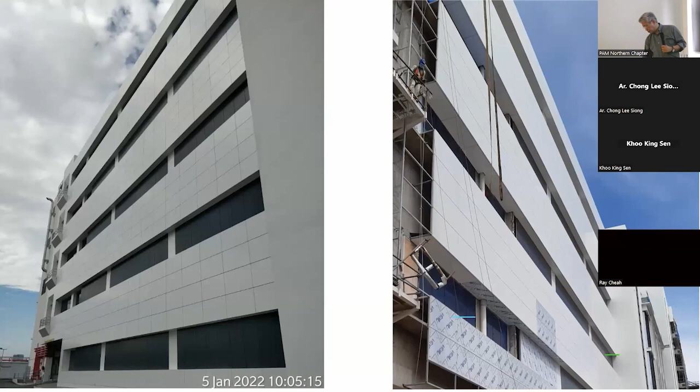So, a bit of history in terms of the timing of this project: we got our building plans approved in late 2019. I believe we got our first DSA 414 round about June or July 2019 - August 2019. We got our building plan through around November, I think around the end of 2019.

So we were ready to construct, but of course we had not submitted any specification for the development because I was still in the BOMBA committee discussing how this would be implemented. The directive was only presented in August 2021, almost 1.5 years later. But we were already working on this project, and of course it would have been totally irresponsible for me not to immediately introduce the 8414 requirements to it.

So it wasn't legislated yet by the time I already started studying the detailing and all that. The actual contract had not been awarded yet at the time. This one went to SC.